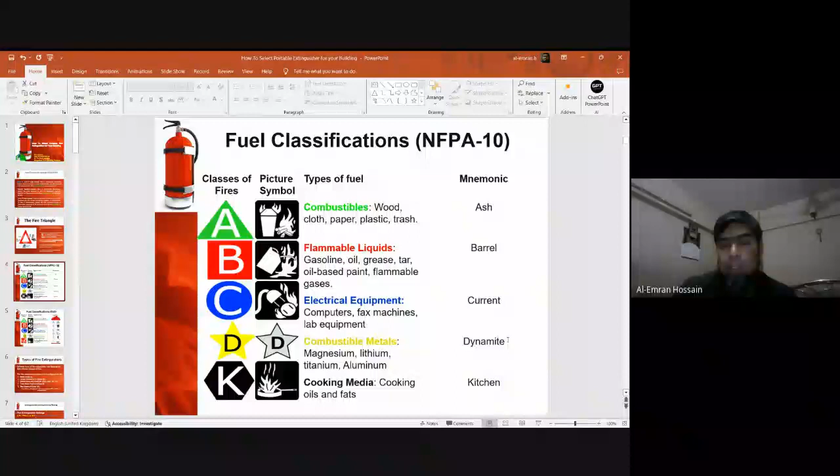Now come to how many types of extinguishers exist in the market in Bangladesh or around the world. Number 1 is the water class — if the extinguisher has water inside, this extinguishes A class fuel. Number 2 is carbon dioxide, that's working for class B and C — you can always remember this fuel class as B and C.

Third, multi-purpose dry chemical, that means ABC, BC, and DC classes. Foam-based chemical is class B. And also the 5th extinguisher is wet chemical, that's class A and K — K means kitchen fire, and A means A class fire.

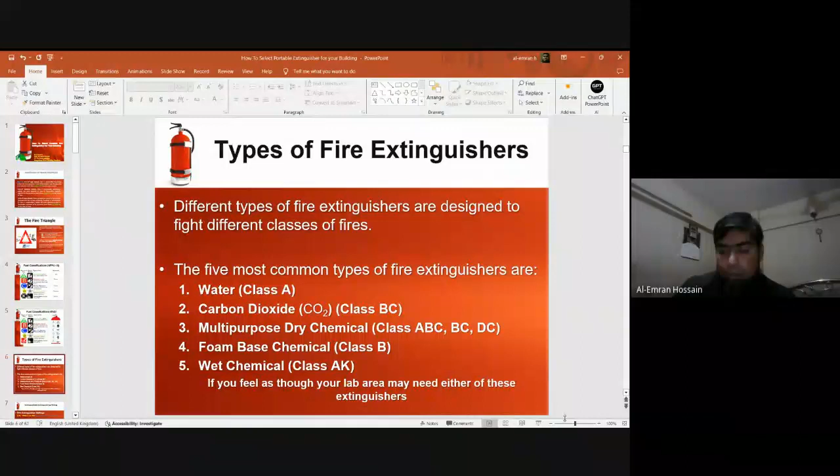So when you purchase a portable extinguisher, there is labeling inside the extinguisher. There are a few words inserted at the top of the cylinder, where it's written 21A, 144B, C, D, and 40F. What is the meaning of that?

The meaning is 1A means 1.25 gallon water equivalent, it will be warm. B means 1 square foot area will be covered for the B class fuel. 1F means 1 liter oil, that means vegetable oils or animal oils.

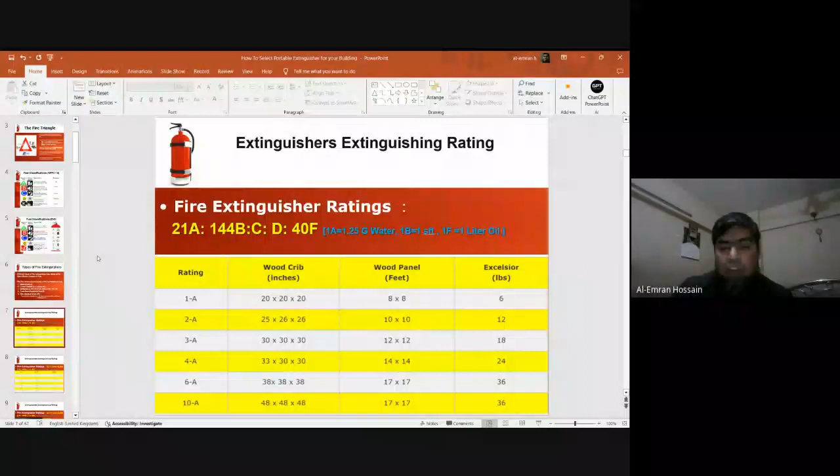So another issue — when you send your extinguisher to the testing lab, the testing lab will prepare for testing how much, in respect of wood cribs in inches or wood panel feet, or lbs considered. If you consider the 10A category of the extinguisher, the wood crib will be 48 inch by 48 inch by 48 inch. In wood panel feet, 17 feet by 17 feet, and in total weight of the excelsior, consider 36 lbs.

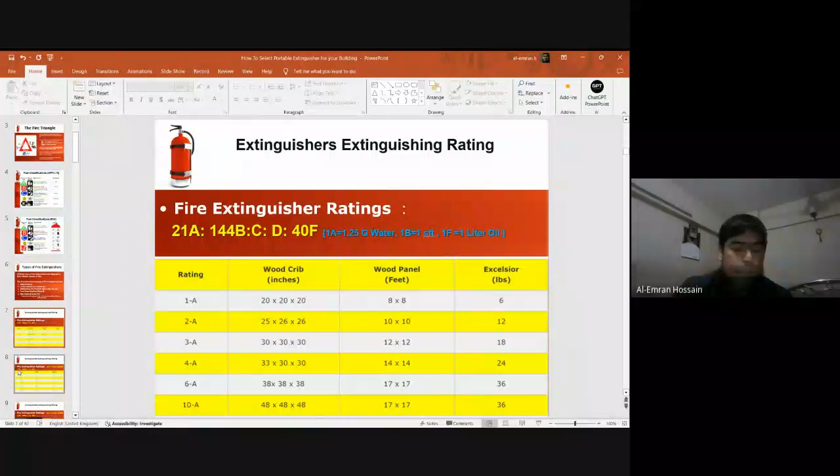So suppose you consider one sample, fire extinguisher rated UL711 and UL299. This is the rating of one of the extinguishers going for testing at the testing lab: 21A, 144B, C, D, and 40F.

For example, if it's 21A, it will be 21 times 1.25 gallon equivalent, that means almost 100 liter water equivalent. Or consider the 1A rating, it will be 8 feet by 8 feet panel.

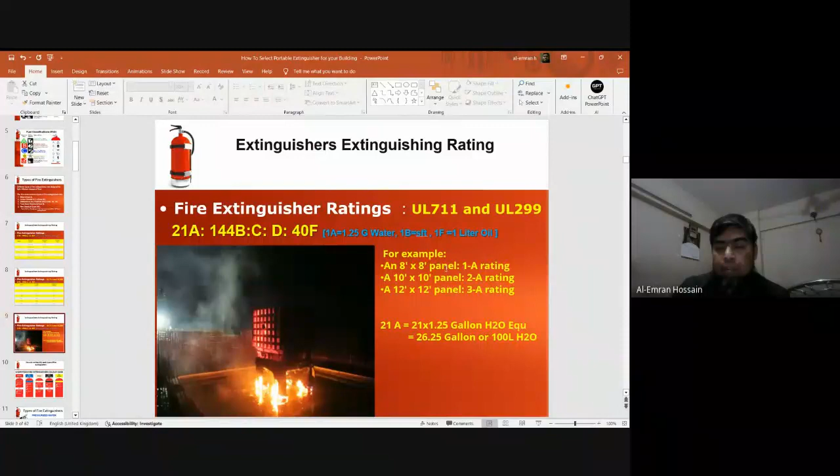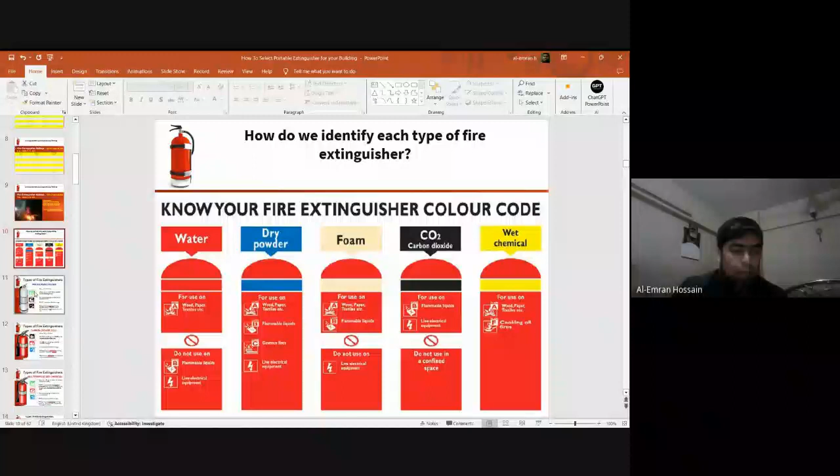Now come to what type of extinguisher and how it works. Class A fire only — so if you consider class A, you can extinguish A class fire only. It will be 2.5 gallon water at 150 to 175 psi, up to 1 minute discharge time.

It has a pressure gauge allowing a visual check. Also, you are working in a 30 to 40 feet maximum effective range.

It extinguishes fire by cooling the burning material below the ignition point. When a class A fire is being extinguished, this method cools the fuel and brings it below the flash point, the point where fire starts. So a class A extinguisher works as a cooling agent, taking the heat element away from the fire.

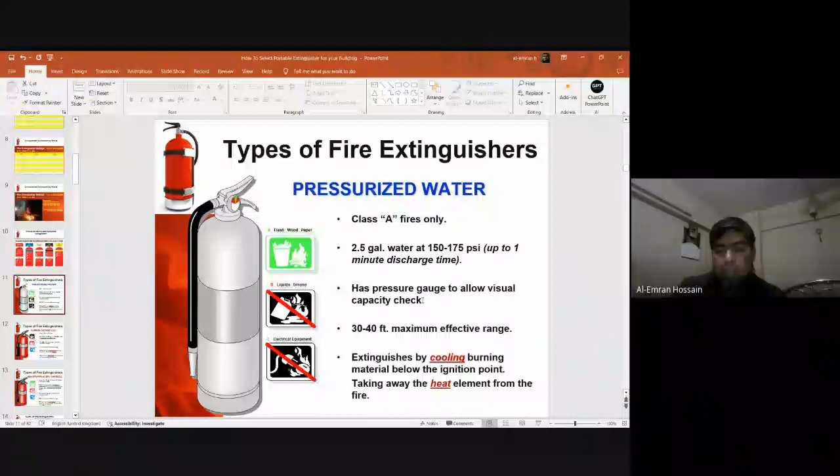Next is carbon dioxide. Carbon dioxide basically works on class B and C fuel fires. It will be 2.5 to 100 pound carbon dioxide gas at 150 to 200 psi, meaning 8 to 10 seconds discharge time. When you pressurize it the first time, it takes about 8 to 10, even 20 to 30 seconds to discharge all the carbon dioxide. Since it has no pressure gauge, it's capacity is verified by weight.

Its effective range is 3 to 8 feet, and it extinguishes by smothering the burning material, displacing the oxygen. As I discussed, the fire triangle has oxygen, fuel, and heat. This extinguisher removes the oxygen from the fuel, blocking the chain reaction, and that's why the fire stops.

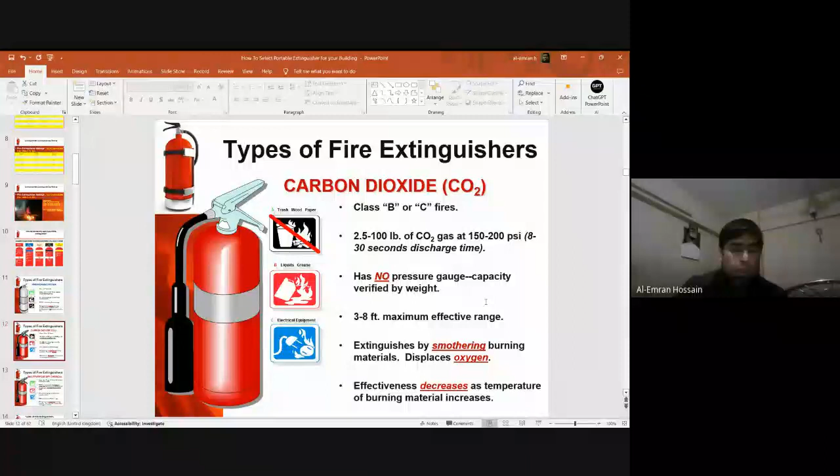Number three, the multi-purpose dry chemical powder, used for A, B, or C fires, or on campuses mostly class A, B, C. It contains 2.5 to 20 pounds of dry chemical at 50 to 200 psi, with a total discharge time of 8 to 25 seconds. It has a pressure gauge to allow a visual capacity check.

This extinguisher has a pressure gauge, so you can easily identify the pressure inside the ABC powder. It works in a 5 to 20 feet maximum effective range, and its extinguishing method is smothering.

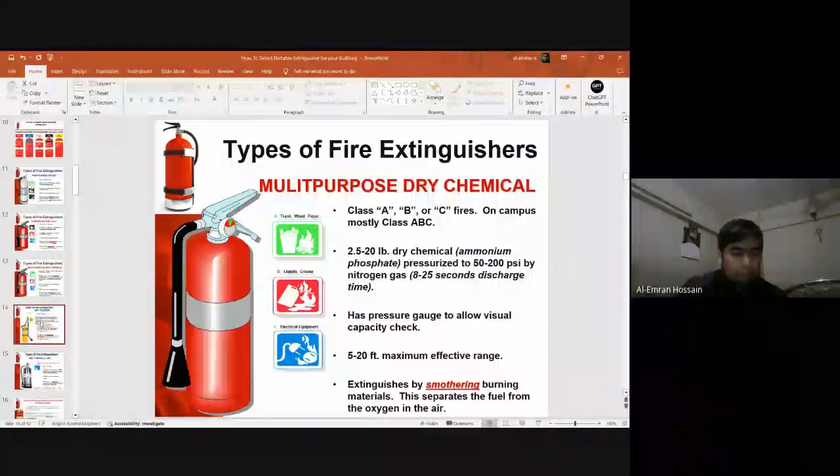Now let's come to a different type of fire, class D fire. Class D fires occur especially in laboratories and other areas where materials like aluminum, titanium, magnesium, lithium, zirconium, sodium, and potassium are present. As you already understand, the yellow color will be mentioned there for this class.

Its effective length is 6 to 8 feet maximum, and its working method is a cooling and smothering system.

Now another one is the wet chemical extinguisher, called class A and K. It contains 1.5 gallons, with a stored pressure of 12 to 14 bar, and a discharge time of 40 seconds. Its effective length is 10 to 12 feet, and it works as a cooling media.

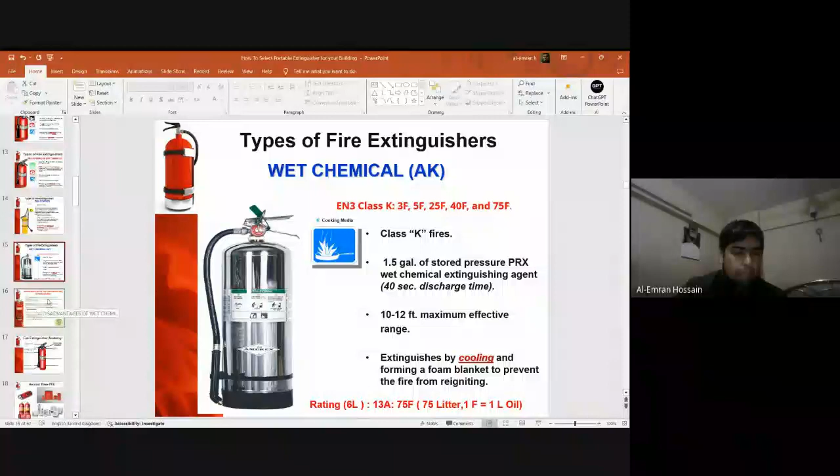A disadvantage of the wet chemical fire extinguisher is that the solution inside is alkaline, meaning it could be corrosive to some metals, especially aluminum. Eyes and skin could become irritated when used, so prompt cleanup is highly recommended. A wet chemical fire extinguisher must not be used on electrical fires, so remember, wet chemical does not work for electrical purposes, meaning class C fires.

When the extinguisher is used, the potassium sprays out in a fine mist, which can react with fats and oils, creating a soapy layer on the surface that smothers, cools, and extinguishes the fire. So wet chemical is used for animal fats and vegetable fats, not for electrical fires. Remember, wet chemical extinguishers are not for electrical fires.

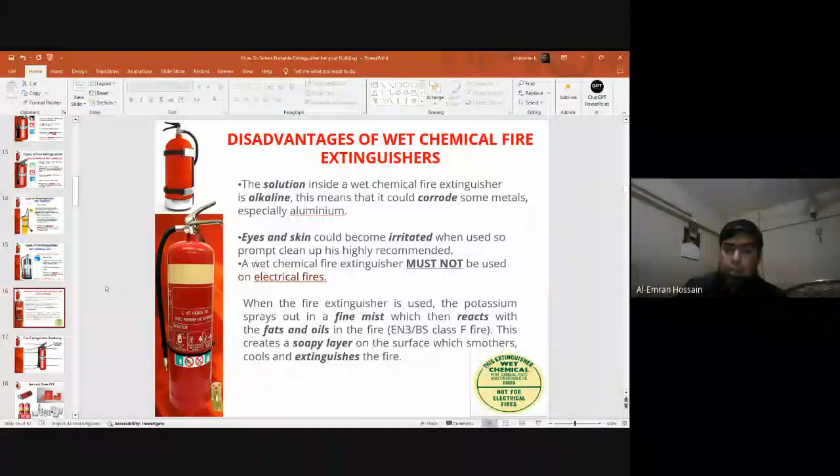Now, what is the major anatomy of the fire extinguisher? It has the body, discharge orifice, discharge nozzle, data plate, carrying handle, pressure gauge, discharge hose, discharge lock pin and seal, and discharge lever.

In the modern context, the ABC powder and carbon dioxide types are over 100 years old extinguishers. Now, in the modern situation, there are different types of fire extinguishers in the market, and most of them are becoming more popular day by day.

Most of them are aerosol-based portable fire extinguishers. This type is environmentally friendly, and also good for human inhalation safety. If you use carbon dioxide or ABC powder extinguishers, they can be harmful for the human body and also for animals. But an aerosol-based fire extinguisher is not so harmful for the human body or animals. It is also much lighter in weight and easy to use.

Now the chemical composition of portable fire extinguisher. If you consider A class fire, the extinguisher rating will be 4A, 10A, 13A, 21A and 34A. It will require approvals like BSTI, ISO, TUV, BP, NFPA, and ULFM. There are also different third-party certification bodies, like CE, LPCB, UL, FM, and BSTI. The standard will be EN3 or BS 5306.

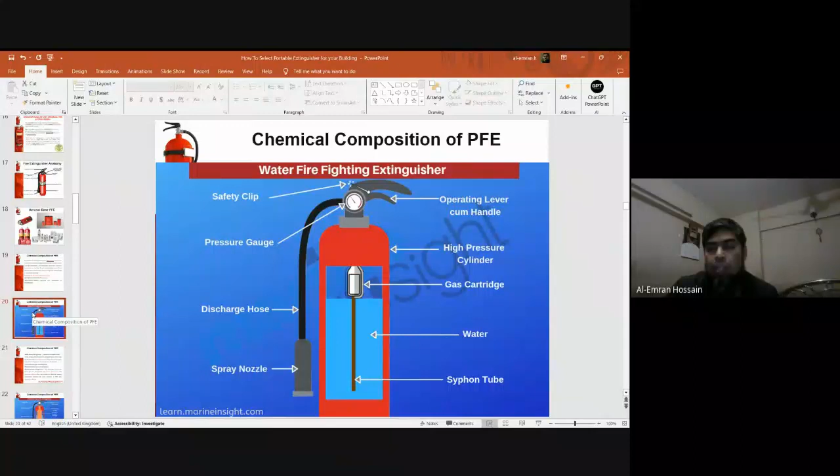The chemical composition for foam type is AFFF foam extinguisher - chemical and mechanical foam. There are 2 types of foam chemicals used: one is the chemical foam type, another is the mechanical foam type. Chemical foam extinguisher is now banned for ships because of the poisonous effect of the gas it creates. That's why chemical foam type extinguisher is not used in modern times.

So now more popular is the mechanical foam type. There are also 2 types of this foam, which we're not discussing today. We have another session only on foam type extinguishers, how to calculate and other things. I hope if you have time later, we can propose and discuss this method.

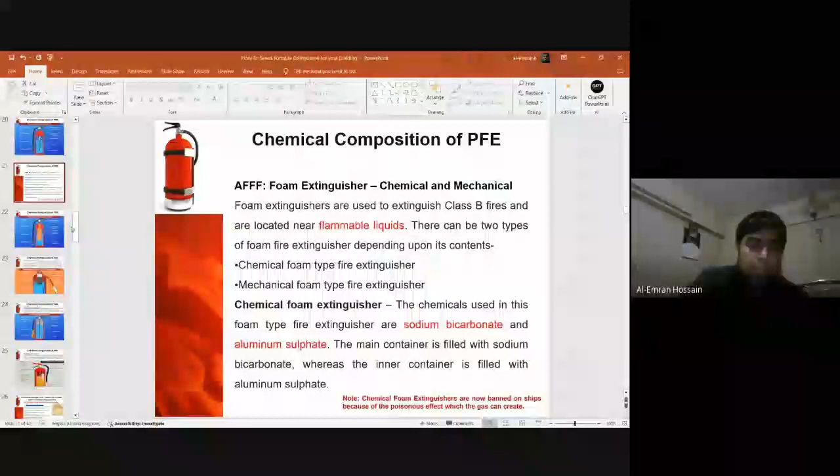Another issue is the chemical composition of the powder type, called dry powder extinguisher, also known as DCP fire extinguisher. It has a handle, safety pin, pressure gauge, tube, gas canister, dry chemical powder, and discharge hose.

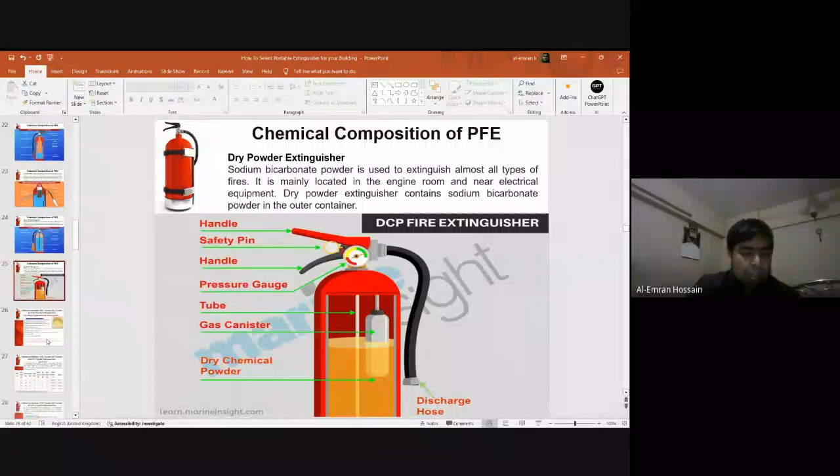In most cases, dry powder extinguishers use a propellant - that means carbon dioxide, or sometimes air or nitrogen gas. Most of the time we fill the propellant as nitrogen gas, which carries out the ABC powder and extinguishes the fire. So what is the difference between ABC powder, BC powder, and dry powder extinguisher?

In modern ABC powder extinguisher, the chemical composition includes monoammonium phosphate. The ABCD dry powder chemical consists of monoammonium phosphate at 60 to 90%, ammonium sulfate at 20 to 35%, magnesium aluminum silicate at 1 to 5%, tricalcium phosphate at 1 to 5%, silica gel at 0 to 3%, and methyl hydrogen polysiloxane at 0.1%.

There's also yellow pigment. Most people understand that when discharging ABC powder, we see the yellow color - this yellow pigment is mixed with the ABC powder, that's why the ABC powder color is yellow. There can be different colors as well.

If you consider a 6 kg ABCD extinguisher, the minimum composition will be monoammonium phosphate at 3.6 kg, and ammonium sulfate at 1.8 kg, along with other components. If you are purchasing this ABC powder from China or other Asian markets, this is the MSDS data sheet from the manufacturer.

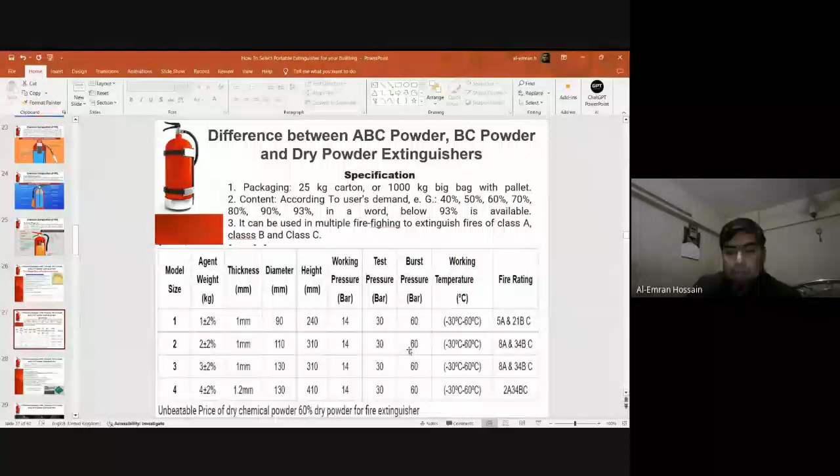Here we understand the model size - there are 4 model sizes. For model size 4, the thickness will be 1.2mm, diameter 130mm, height 410mm, working pressure 14, test pressure 30, and burst pressure 60. It works from minus 30 to 60 degrees Celsius. The rating will be 2A, 34B and C.

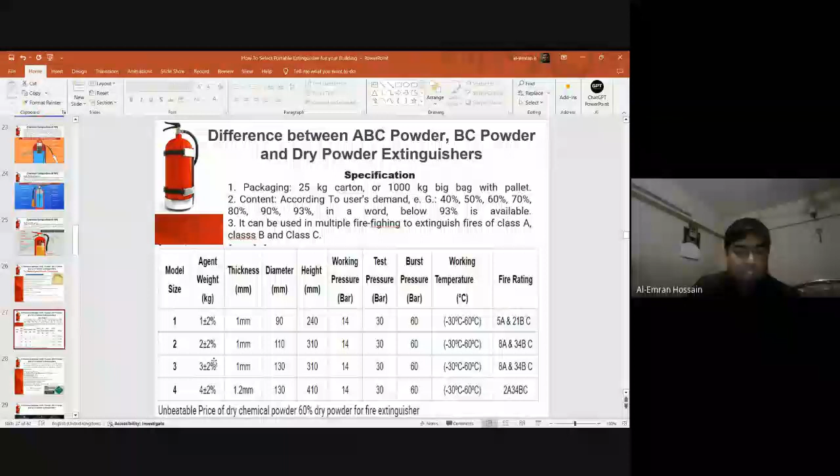Now come to the BC powder. In most cases in Bangladesh, BC powder is being sold but labeled as ABC powder. For A class fuel classification, the fire can reignite - that means after you extinguish the fire, A class fuel may reignite. That's why we need special monoammonium phosphate (MAP), which works against reignition.

When you consider BC powder, the A class fuel component is omitted. But in the market, most extinguishers are actually BC powder extinguishers, but they're being sold as ABC powder. So what do you mean by BC powder?

BC powder extinguisher consists of the following ingredients: sodium potassium bicarbonate by weight 90%, mica 1 to 4%, clay 1 to 4%, amorphous silica 0.2 to 1.5%. Its color appearance is white powder, with apparent density of 1 gram per centimeter cube. Its NFPA health hazard is 2, with no flammability and no reactivity. Its price is 480 dollars per ton, which is less than the price of ABC powder.

That's why the market is so popular, this BC powder. So beside yellow color, we have different color types of ABC and BC powder also. There is another reddish and another greenish color also.

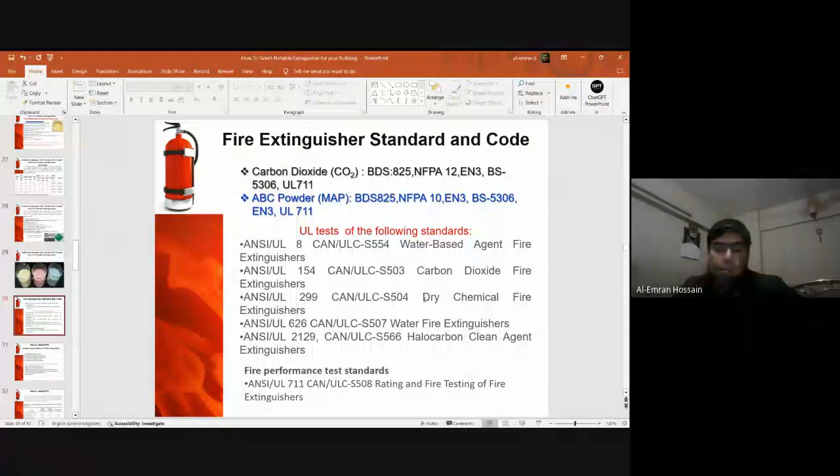Now come to how to select your portable fire extinguisher. Firstly, you will consider classification of fuel, which fuel you are going to extinguish. Second, extinguisher classification system. Third, classification of hazard. Fourth, selection of specific hazard. Fifth, selection of specific location.

The following 6 factors must be considered: type of fire most likely to occur, size of the fire most likely to occur, hazard of the area where the fire is most likely to occur, any energized electric equipment in the vicinity of the fire, ambient temperature condition, and other factors.

Now, how to select the portable fire extinguisher? If you consider the UL standard, there is already a discussion. Three hazards are there: light hazard, ordinary hazard, and extra hazard. If you consider a low hazard, that means light hazard, you will use the rating system 2A, ordinary hazard is 2A, and extra hazard is 4A.

So minimum rated single extinguisher, maximum floor area of Class A fuel covered is 3,000 square feet for light hazard, 1,500 square feet for ordinary hazard, and 1,000 square feet for extra hazard. The maximum floor area covered by one extinguisher is 11,250 square feet for light hazard, same as ordinary hazard, same as extra hazard.

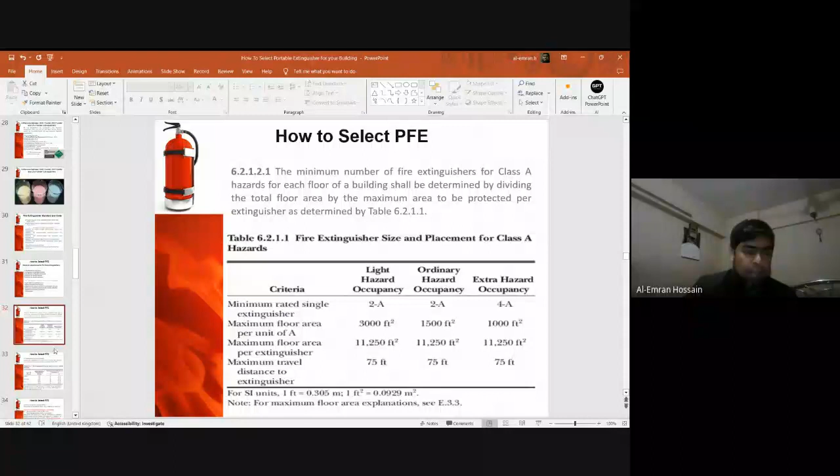The similar for Class B: Class B means liquid and gaseous fuel which is inside a container or barrel. What will their rating be? For light hazard, it will be 5B, minimum travel distance 30 feet. Ordinary hazard it will be 10B minimum, and extra hazard is maximum 80B, with maximum travel distance 50 feet.

Now, in a case study, if you consider one RMG factory, as per BNBC, this occupancy type is G type. Total floor area is 5,000 square meters. So how many extinguishers are required?

If you consider EN3 or BS 5306, we need area in 0.065 rating units per square meter, where area is 5,000 square meters, in 0.065 we require 325A. If your extinguisher is a 6 kg ABC cylinder, rating is 21A, 144B and C. So each 6 kg ABC cylinder covers 200 square meters, so 5,000 divided by 200, 25 cylinders are required.

If you consider FSCD, Fire Service and Civil Defense Bidhimal 2014, it clearly mentions 500 square feet requires one extinguisher. That means we require 107 cylinders. If you consider Bidhimal 2021, it requires 1,000 square feet equal to one extinguisher. That means we require 54.

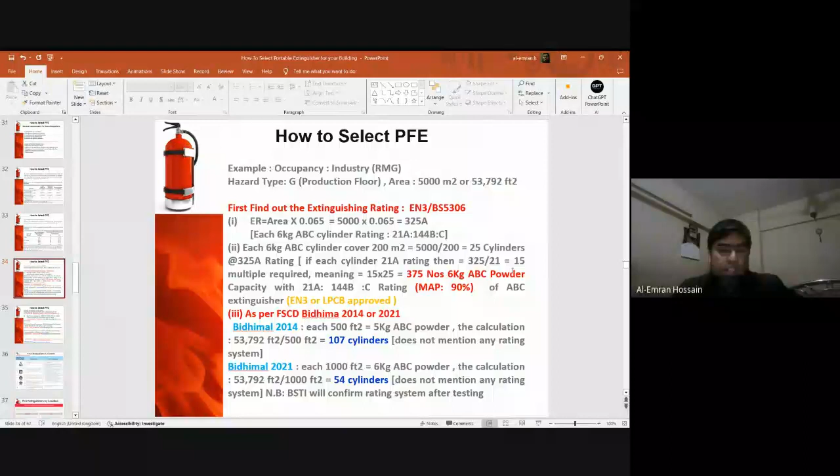Now come to NFPA 10. A class means ordinary combustible. So extinguisher by location - where will the location be? The location will require the fire extinguisher size and spacing, and also determine the minimum number of extinguishers already calculated. So these are your rules: A class, B class, C class, and D class.

We remember A class is always maintained where you are standing and where the cylinder is - that will be your travel distance. But when you consider B class, it is not for the people; where the fire incident is and where the extinguisher distance is, this will be considered. So the others are the same, C and D also.

Now where will our extinguisher be located? There are two options. If your extinguisher cylinder is more than 40 pounds, that means 18.1 kg weighted, it will be at floor level, the floor level to 4 inch, and the maximum distance will be 3.5 feet. So when it's less than 40 pounds, that means 18.1 kg, it will be in hanging position at 5 feet, and same at the bottom of the floor, the gap will be 4 inch.

Now come to the travel distance. So now you get the 4 inch. There are two options: it will be 5 feet maximum, and the other is 3.5 feet is the maximum. So it will be 75 feet as the travel distance.

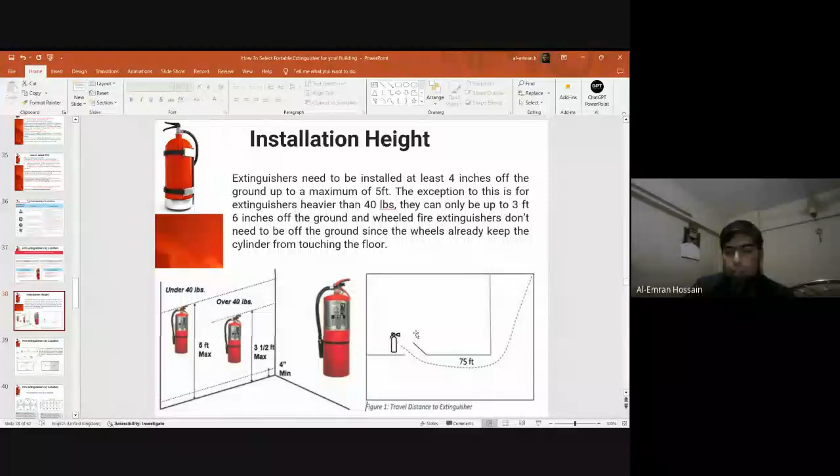So now if you consider A class fuel, how will we calculate and how to position your extinguisher? When fire starts, you can go there - the extinguisher is 75 feet and back another 75, that is 150. No, this is only the calculation. Now come to the real scenario.

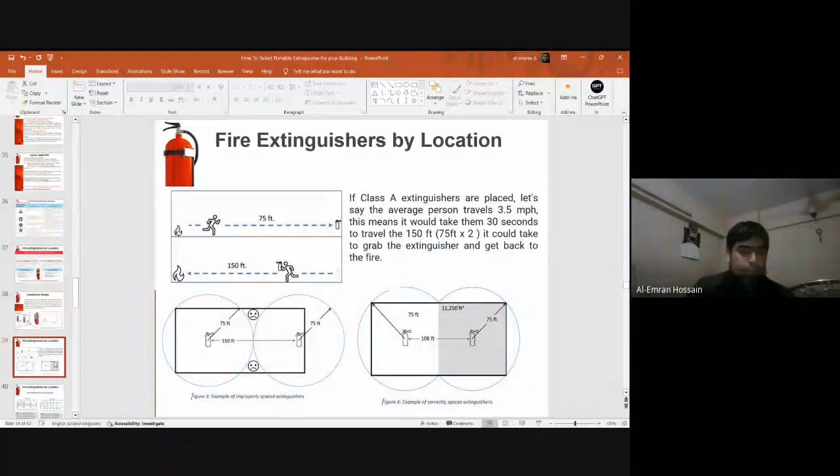So if every extinguisher covers 11,250 square feet, and the minimum - sorry, maximum travel distance will be 75 feet. So if you put it this way, the portable extinguisher to portable extinguisher distance will be 106 feet. So this is the correct one. This way, another picture is here, so you can get the figure.

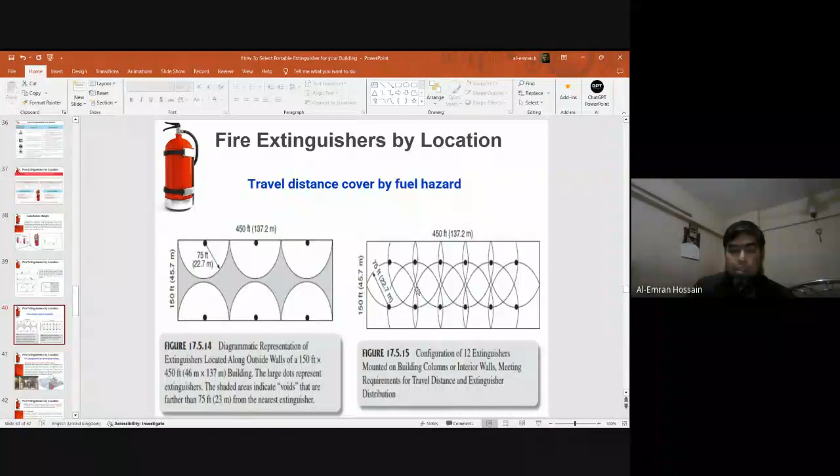So how to calculate and how to position your portable extinguisher in the big space - this way you will consider.

So fire extinguisher for server switch room. In the modern era, in most cases in data center switch rooms, we are not using portable fire extinguishers. We are using fixed type clean agent, as per NFPA 2001 and NFPA 2010. So it will be clean agent.

There are several clean agents in the market: FM200, Novec 1230, nitrogen gas, inert gas, and also other HFC 236, and different types also. As per the Kyoto Protocol and Montreal Protocol, day by day HFC 227ea or FM200 will be banned, so only the green refrigerant is coming into the market day by day.

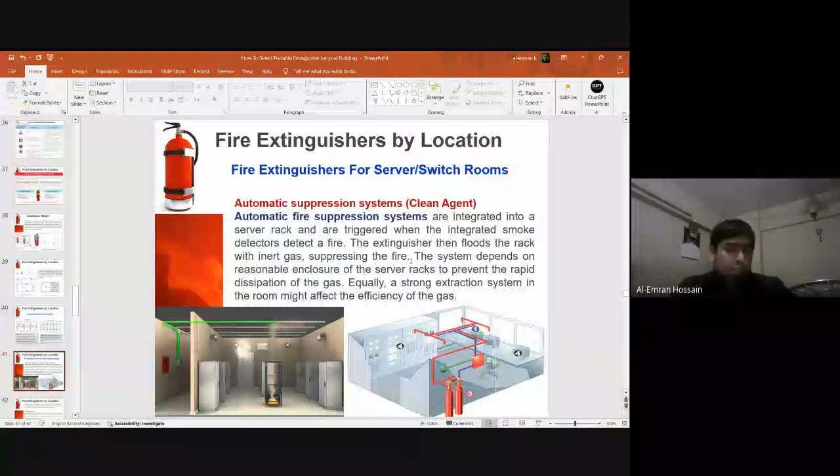So in most cases, two things are considered with clean agent: one is the ozone depletion, another is the warming potential. So in the present situation, FK-5-1-12 and Novec 1230 are the more clean agents nowadays.

So extinguisher by location - what will be the location, and as we discuss in NFPA 10 Article 5.1, specific here independent of whether the building is equipped with automatic sprinkler, standpipe and hosepipe, and fixed protection equipment, the label visibility - you can easily find it where there is no obstacle, and placement is also important.

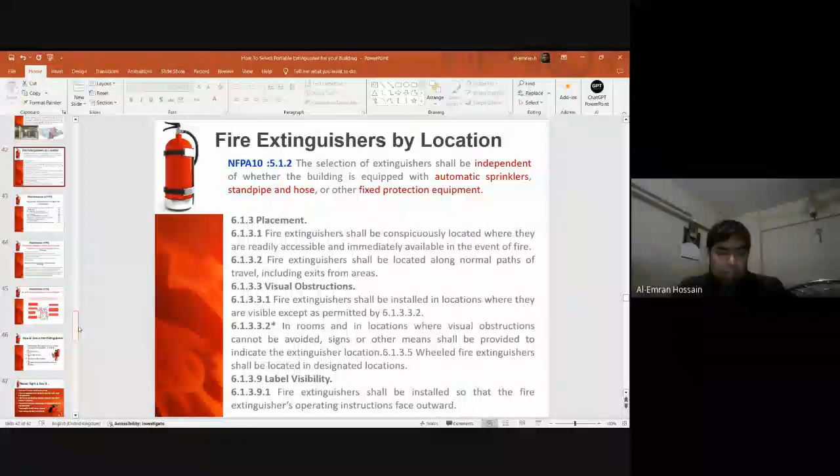So the important issue - in most cases, the fire extinguisher location is inside the floor and also nearby the staircase, also the visibility area or travel distance area, so you can easily find the extinguisher. There should be no obstacle inside or obstructing the portable extinguisher.

Now come to our maintenance of portable fire extinguisher - this is a vital question. How much time interval can we maintain our portable extinguisher?

So now here's a burning issue in Bangladesh. In most cases, ABC powder extinguishers use nitrogen gas as the propellant, but they're using wet nitrogen, which has a lot of moisture inside. That's why the MAP, monoammonium phosphate in the ABC powder, being a hygroscopic element, absorbs the water particles from the wet nitrogen, and within 1 or 2 years it creates a solid ring inside the cylinder. That's why fire service civil defense circulates them every year and refills the ABC powder.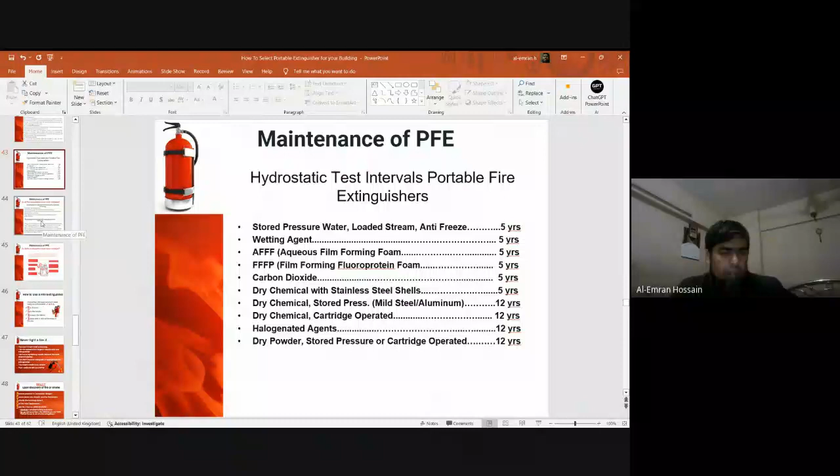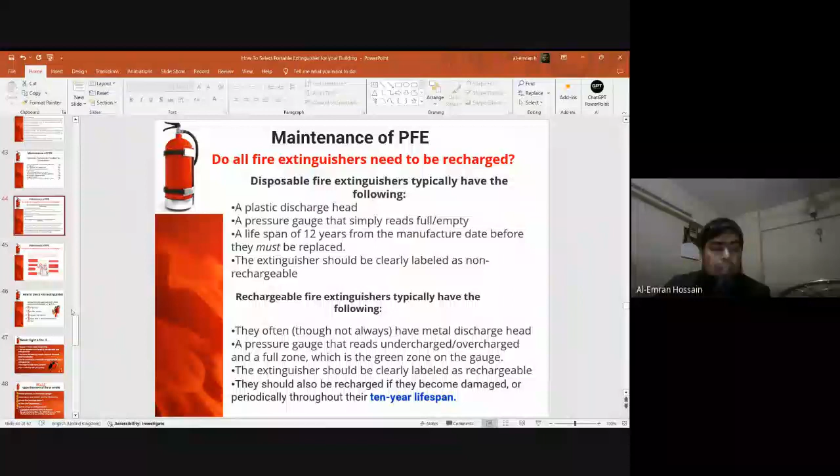So do all fire extinguishers need to be recharged? Not necessarily, but you need to check and inspect them. The ABC dry powder has a lifespan of about 10 years, but due to the wet nitrogen or propellant issue, we refill the ABC dry powder and other components every year.

We can also check whether a fire extinguisher needs to recharge. First, check for a broken or missing pin or handle. Second is slow pressure loss, showing the pressure already lost inside the cylinder. Then we record the recharge, meaning we note when we're going to recharge our portable fire extinguisher. Third is unstable handle. Fourth is the age, and NFPA requires replacement every 12 years. Fifth is a missing inspection tag. Sixth is a cracked, ripped, or clogged hose or nozzle. Seventh is visible corrosion or rust. Based on these 7 causes, we can determine if our portable fire extinguisher needs recharging.

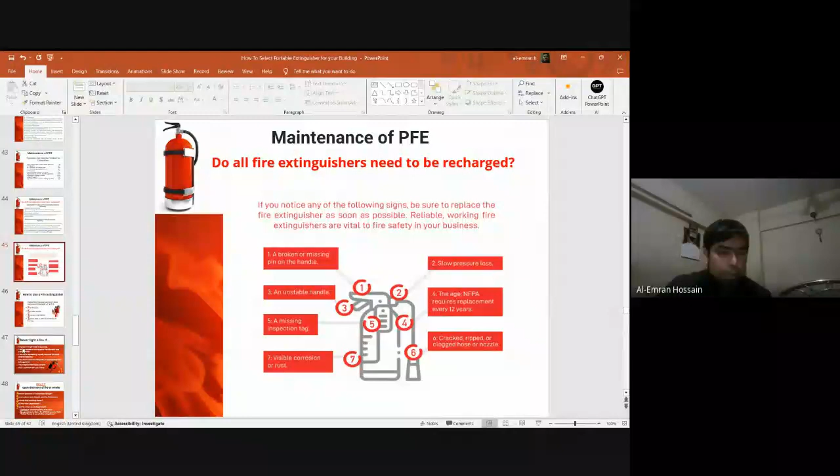Never fight a fire if you don't know what is burning. If the fire appears too large to handle with one extinguisher, if the fire is spreading rapidly beyond the spot where it started, if you don't have an adequate or appropriate fire extinguisher, if you might inhale toxic smoke, or if your instincts tell you not to - in these cases, you should not attempt firefighting.

Upon discovering a fire or smoke, how should you react? Remove persons in immediate danger, ensure doors are closed, activate the building alarm, call the fire department, and treat all fires as dangerous. In some cases, during a fire drill or mock drill, most people think there's no real fire, that it's only a malfunction causing the bell to ring. That is the wrong idea.

So how should an extinguisher be serviced? For a stored pressure water fire extinguisher, you can check all the tags, the pressure, the level, everything. Another way the extinguisher should be serviced: remove the discharge hose and check it, and remove the O-ring and replace it if applicable or required.

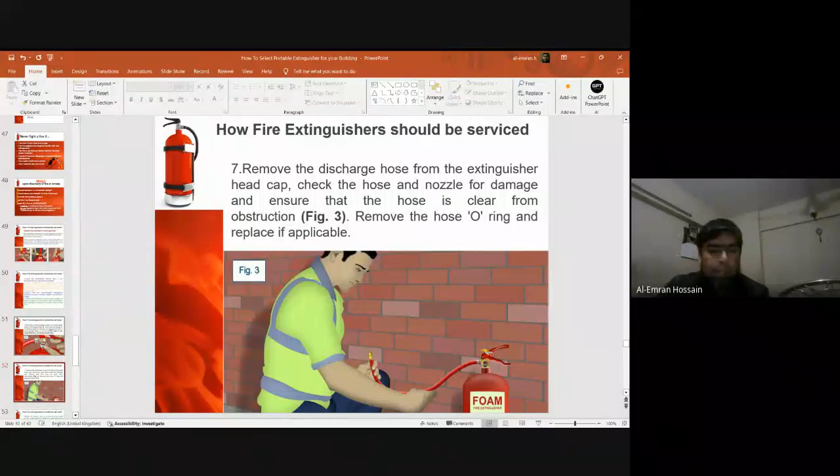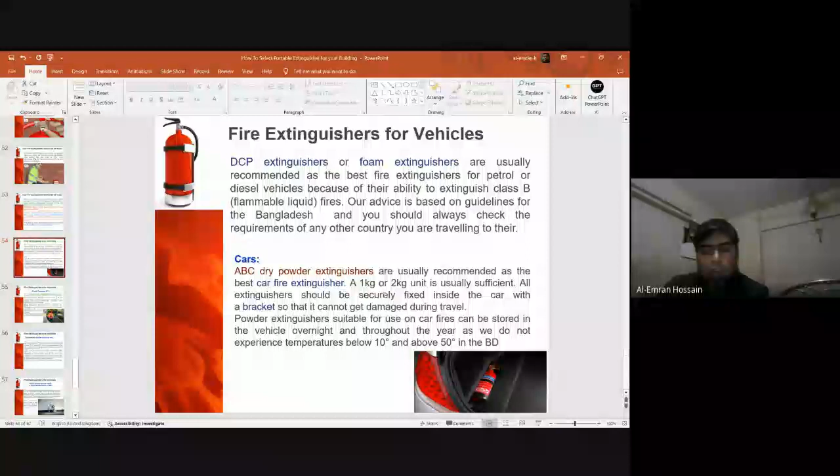Which type of fire extinguisher should be used for vehicles? Especially DCP extinguisher or foam extinguisher are usually used for cars, and ABC dry powder will also be used for the car. What will the total weight be? It will be 1 kg or 2 kg of agent weight, not the total cylinder weight - just 1 or 2 kg of agent weight. Another category is commercial vehicles, where we can also use ABC dry powder.

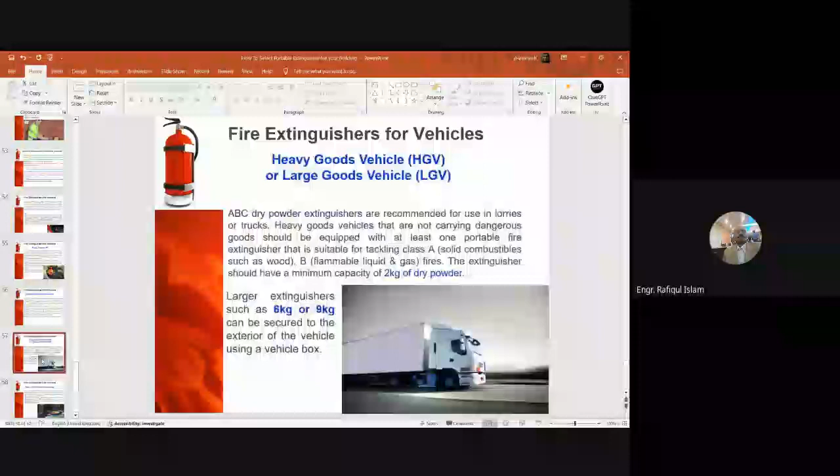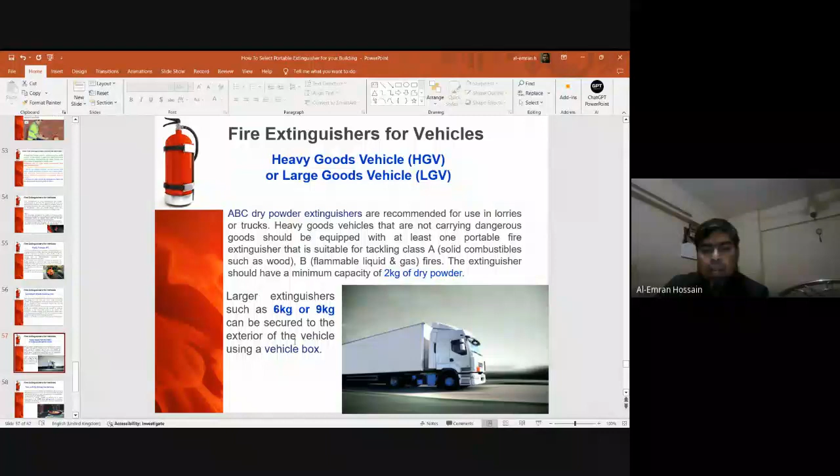For heavy goods vehicles, HGV, and large goods vehicles, we use 2 types of extinguisher: one is ABC dry powder, another is foam type, which will be 6 and 9 kg. For taxi or private hire vehicles, we use 2L AFFF foam extinguisher also, as per international rules and regulations. And for caravans and motor homes, you can use a water mist extinguisher, or also ABC powder.

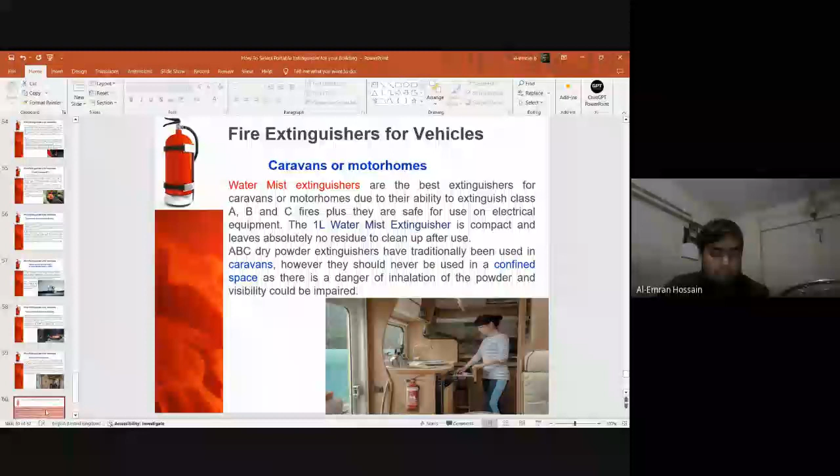Who are the authorized persons? Only they can replace and recharge the portable fire extinguisher. There is a different procedure - an SOP exists, especially from the fire and explosive department. They have the procedure for how to refill your extinguisher, and that's what we are following, internationally as well.

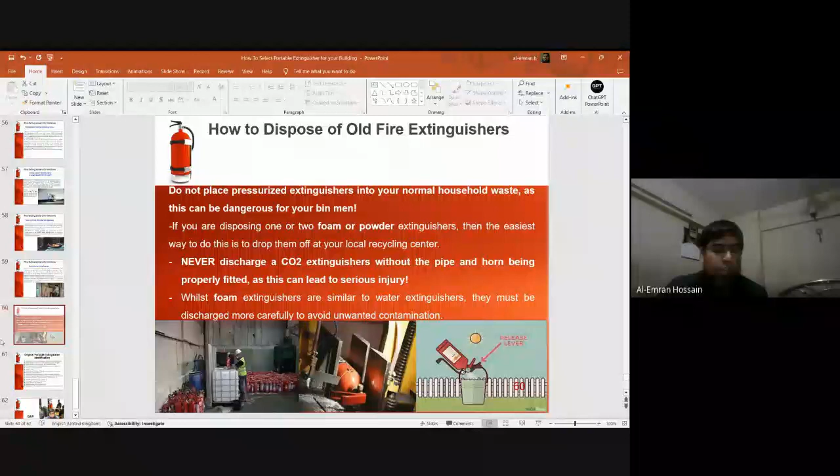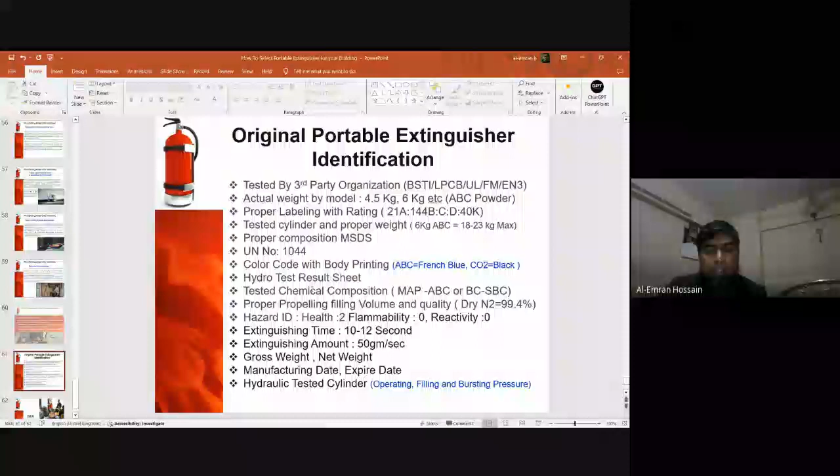How much percentage is there? Proper propelling, filling volume and quality. Dry nitrogen 99.4%. Hazard-wise, it's not a health hazard to the flammability or reactivity. Extinguishing time will be 10 to 12 seconds, and extinguishing amount, meaning when you pressurize the lever, the extinguishing agent will be 50 grams per second. Also gross weight, net weight, manufacture date and expire date. For the hydrostatic cylinder, especially operating, filling, and bursting pressure are important.